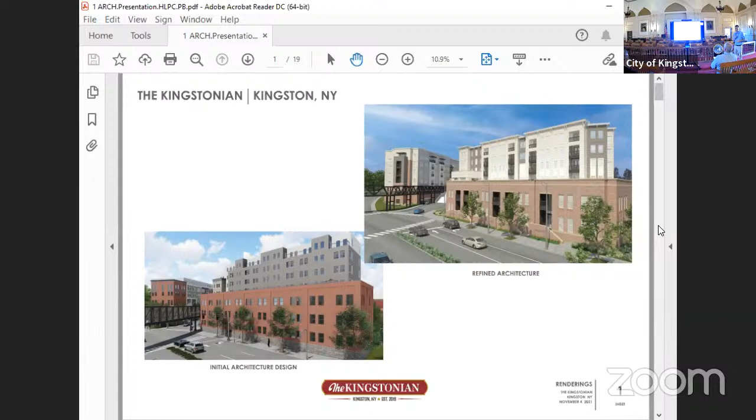So this is the view from Schwenk Drive here. There's a parking garage entrance. You see the blue car here with 2 entrances, one to the east, one to the west. And when we get to the floor plans, you'll see how all of that flows. There's also an entrance to the parking garage, public parking garage from North Front Street.

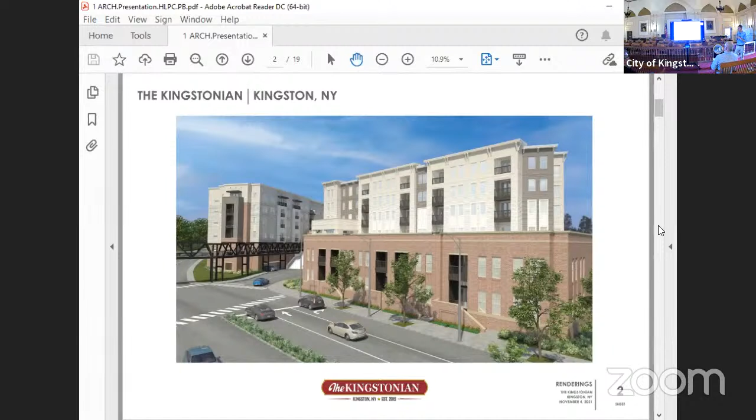Here's a view of the project from Wall Street and North Front Street. Again, notice more detail has been added to the facade, much more variety and interest with the bay windows here. The building is more complete and complementary to the existing context in Uptown Kingston.

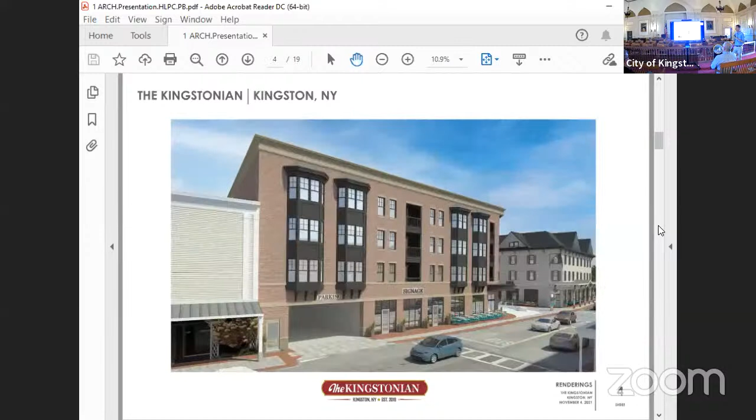Here's a close-up view. We have street level retail, the entrance to the public parking garage, pedestrian plaza that Dan's going to talk about in detail, the hospitality element of the project off to the east there.

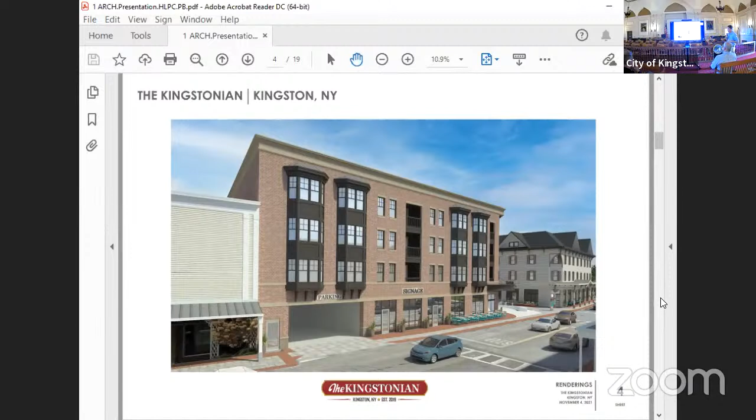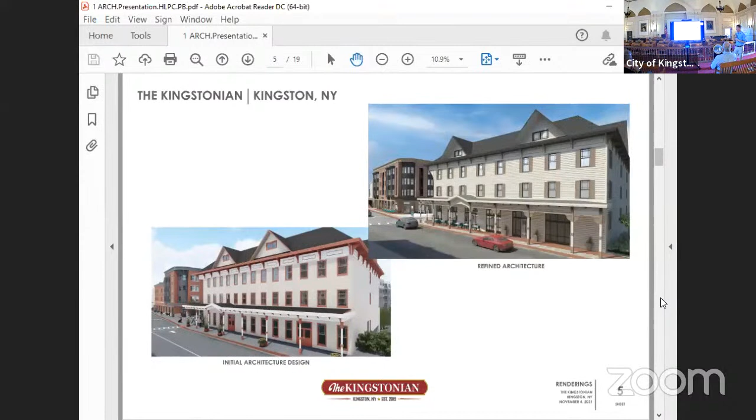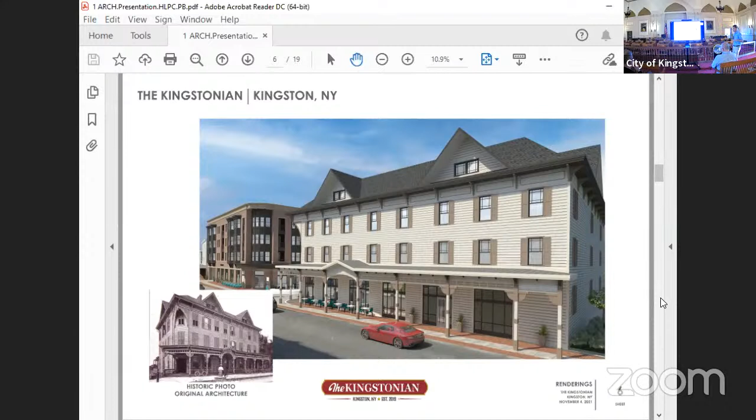There you go, close-up view. And you can see that we've modified the fenestration package for those of you that were watching the project over the last 5 years, to bring it into greater harmony with the context of Uptown Kingston.

Floor plans, this is the lowest level from Schwenk Drive. The elements are color coded here. The green is parking. We're going to work our way up through the plans here.

The elements in yellow are vertical circulation, so that's either stairs or elevators. There are multiple elevators in the project, public elevators as well as resident-only elevators. Where that condition occurs, they are side by side with one another, and residents would use a key fob or a card access, and the general public can use the elevators to get to the lower levels.

Now would be the time that we talk about the circulation through the garage, how traffic will flow from Schwenk entering, and then also front, and then how the traffic will come in on the parking spot and then exit out. Certainly, coming in from Schwenk Drive, there are two entrances to the parking garage, one to the east and one to the west.

So I'm going to step across the screen here. So from Schwenk Drive, cars can enter this side of the parking garage. Ultimately, they connect, or residents would enter this side, and the resident parking is secured.

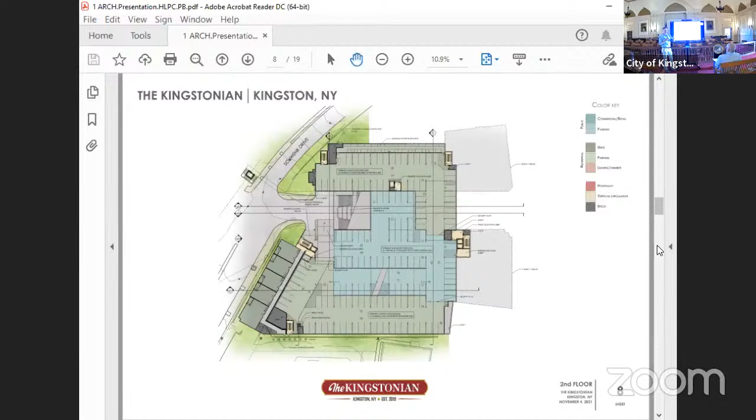Then maybe, Kyla, you might need to flip forward a couple of slides till we get to, here we go. So from North Front Street at the end of Wall Street, this is where vehicles enter only. There's no exiting of the vehicles. That gets public or resident cars into the internal ramping, parking layout, and ultimately they would exit out of Schwenk Drive.

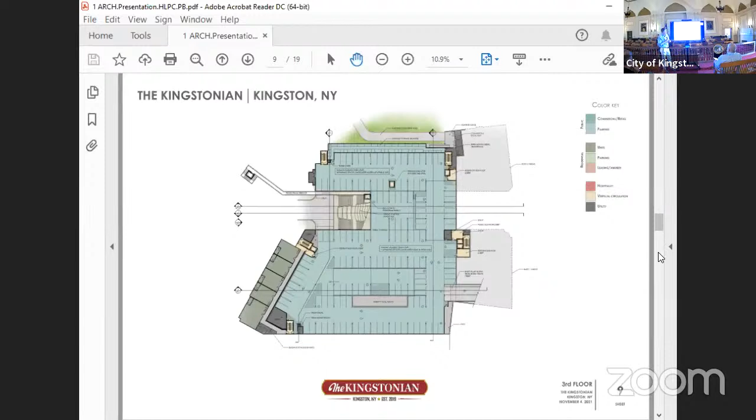The pedestrian link takes you along the eastern edge of the plaza to this element here, which is an elevator, a handicapped accessible elevator and stair that would get you down to street grade.

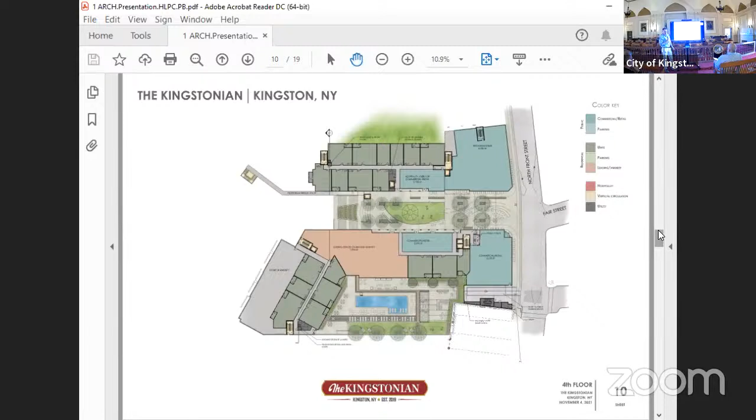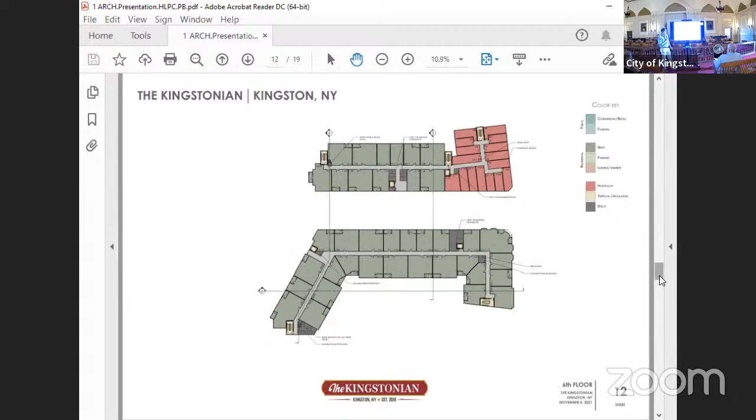On the upper floors, the reddish color here are the hospitality rooms. Green color here are apartments. Again, it's the 6th floor.

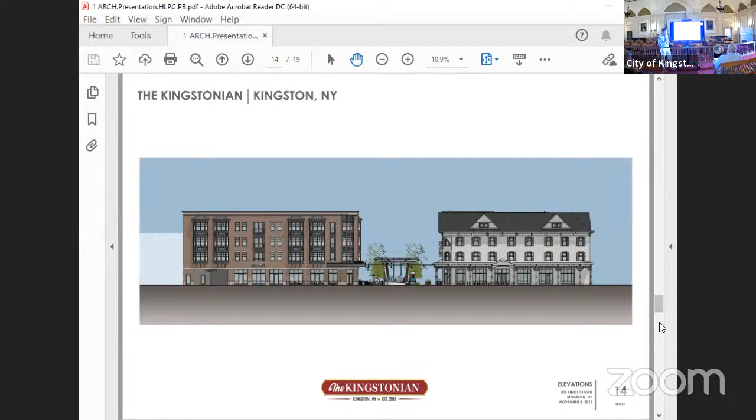In the package that's been on the city website for the last few months, you see 2-dimensional colored elevations. The plaza here. Elevation view from Schwenk Drive.

These elements here are stoops that get people up into the first level of apartments on Schwenk Drive, which is a half a level up from the sidewalk elevation. It has handicapped accessibility with internal vertical circulation. But these elements here is your traditional, like, brownstone type of front stoop.

Cross-section views through the project, North Front Street, Schwenk Drive here. Here's a view looking east, North Front Street here. You see the pedestrian bridge and the vertical elevator element there.

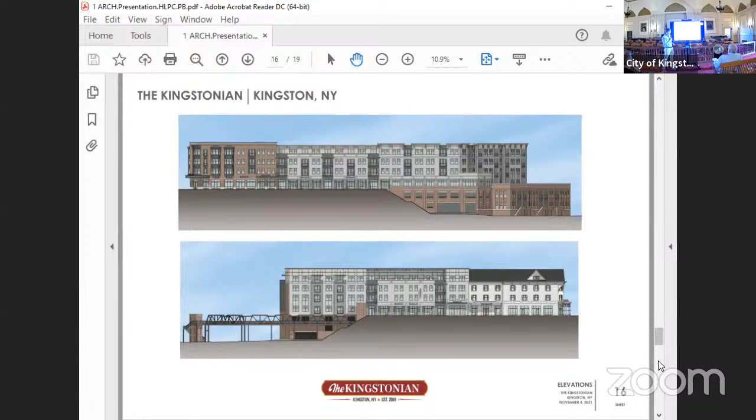These are 3-dimensional views that were prepared primarily for the benefit of the Landmarks Preservation Commission and the Heritage Area Commission. You start to see here the architectural detail that's more contextual to the Uptown District than the earlier iterations of the project.

Discuss the different types of building materials. Sure, that are being prepared for these structures. With a sense of heights, so the building that's on North Front Street to the left here, that's brick.

These elements here would be a product called Extira or Boral or Hardie board, so that they can be painted. We have storefront glass on the ground level, and I should note that we did clarify for Landmarks and HAC that despite the fact that there is a reflection shown here in these illustrations, the glass would be non-reflective. That's just a function of the computer rendering software. The other elements would be Hardie board, and the wooden brackets up here, they're not going to be pine, they'd be a product like a Hardie product, Extira or Boral, so that they don't need to be painted every 3 years and they'll last over time. But these are painted elements.

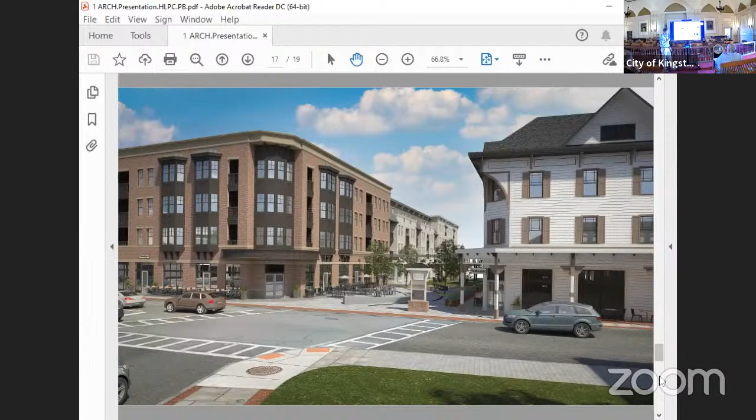Same is true for the building on the east side. We have asphalt shingles on the hospitality element. And then, of course, the regular commercial flat roofing that is not visible from the street on the structure. Dan is going to walk us through the materials proposed for the plaza.

Another internal view. This was requested by the Historic Landmarks Preservation Commission to present for the public and their board what the interior facades look like, and to illustrate and demonstrate the amount of detail and variety and depth in these buildings. You can see here that there are elements that pop off the main facade so that it's not, as it appears in a two-dimensional elevation, a flat facade. There are a lot of opportunities for the sun to create shadows and interest in these interior facades.

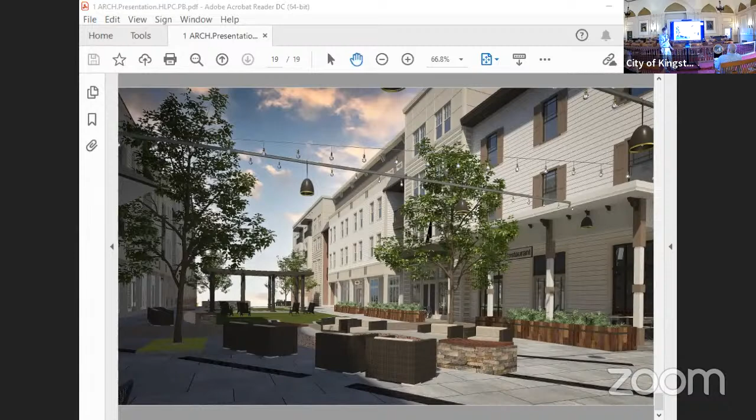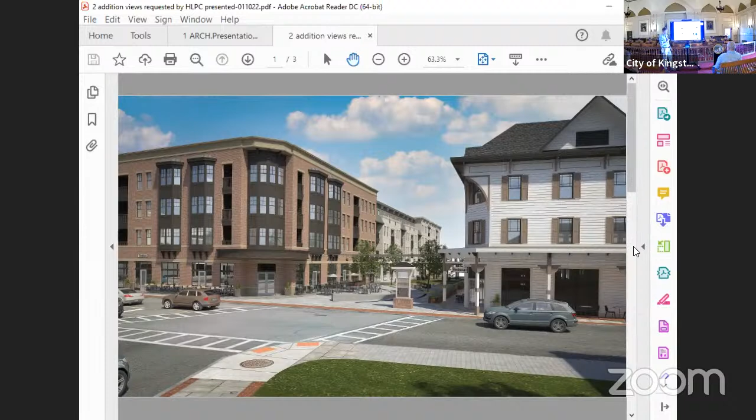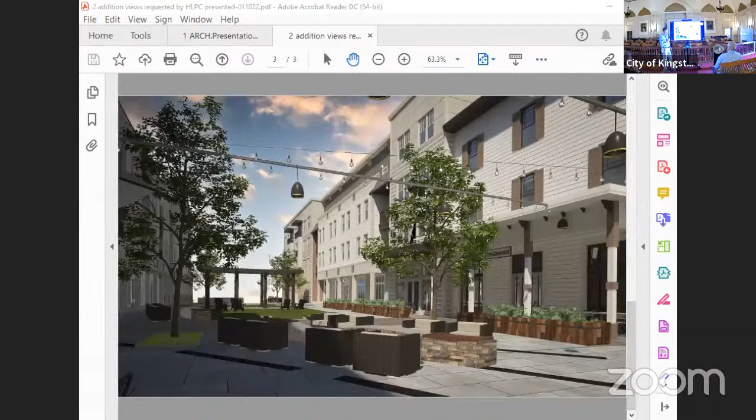We showed this. This view was specifically requested by the Landmarks Preservation Commission, as was that one. So with that, I'm going to hand it over to Dennis Larios, unless there are questions about architecture.

Thank you, Scott. Thank you, planning board members. I'm Dennis Larios from Brinnier and Larios Engineers in Kingston, working on the site civil engineering elements, services to the building. As you know, this site is 95% building and pedestrian plaza, so a lot of my work is around the periphery of the site.

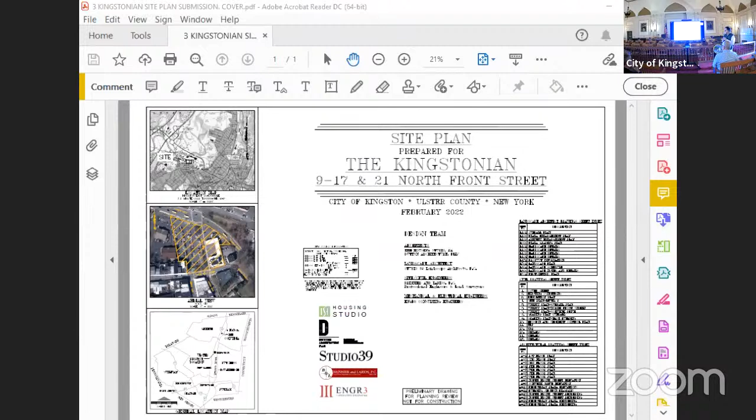Existing conditions.

The former city parking garage, which before that was the Montgomery Ward's building, is on the western side of Fair Street Extension, representing about 1.4 acres. Fair Street Extension itself, from North Front Street to Schwenk Drive, is 3/10 of an acre. The Herzog properties, the old Herzog warehouse and the Uptown Grill site, are 8/10 of an acre. So the project site is essentially 2.5 acres of land situated between North Front Street and Schwenk Drive.

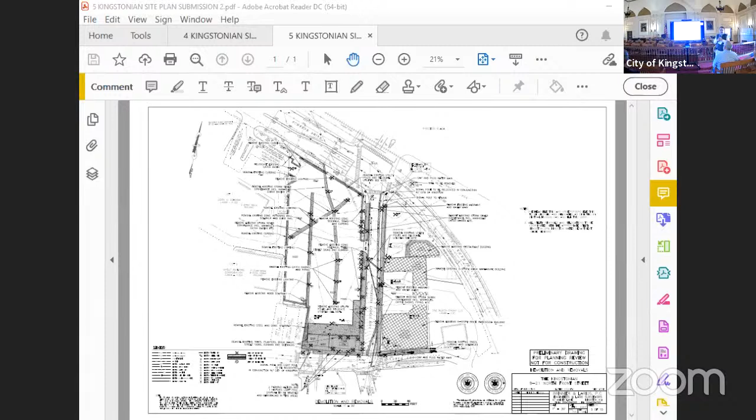This represents the removals, everything that has to be removed from the site before construction begins: storm sewer lines for the existing parking lot and the buildings themselves, and retaining walls, etc. That is all outlined and detailed on the removals plan.

So you can see the West Campus building and the East Campus building. For information purposes, about 98 of the apartments will be in the West Campus, and 45 apartments will be in the East Campus.

This is the entrance Scott was referring to into the garage, either on the west side or the east side. This will be a service entrance for deliveries to the building and for refuse collection, which will occur here and here. Refuse will be stored in the garage space in compactors and rolled out at delivery time, including recyclables, which will also be collected and rolled out at delivery time.

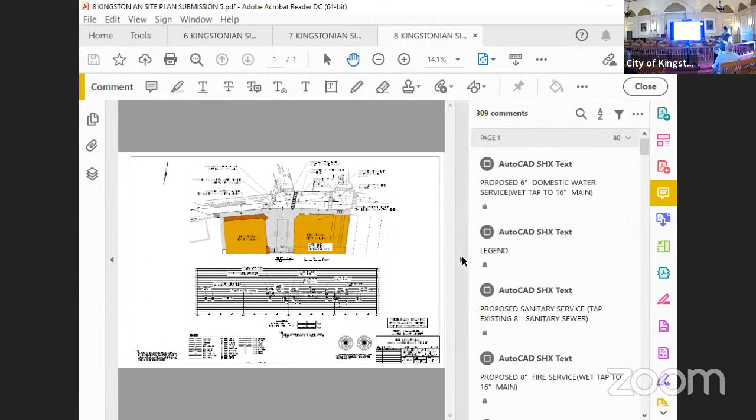This is just a detail of that work out in North Front Street, along with profiles of the storm sewer work and more detail of the water line work we're doing there.

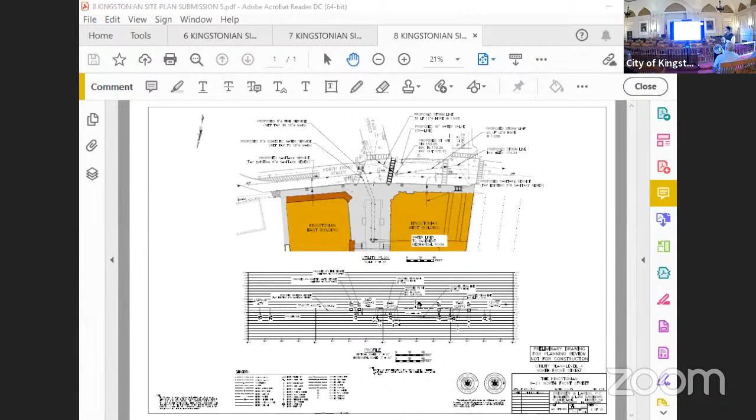Gas and electric is being coordinated now with the mechanical design team and Central Hudson. We've been meeting in Scott's office, and they are working on that.

Central Hudson said they probably wouldn't take it from Frog Alley; they would take it from Hurley Avenue. But they're obviously very interested in serving the project and working with the developers—so much so that they brought 4 guys from Central Hudson. We did a charrette meeting in our office with the mechanical engineers and civil, but for the most part, they're looking to come off of Schwenk Drive.

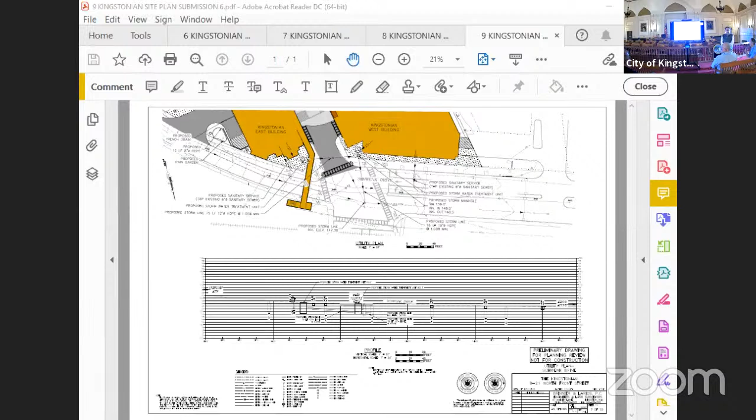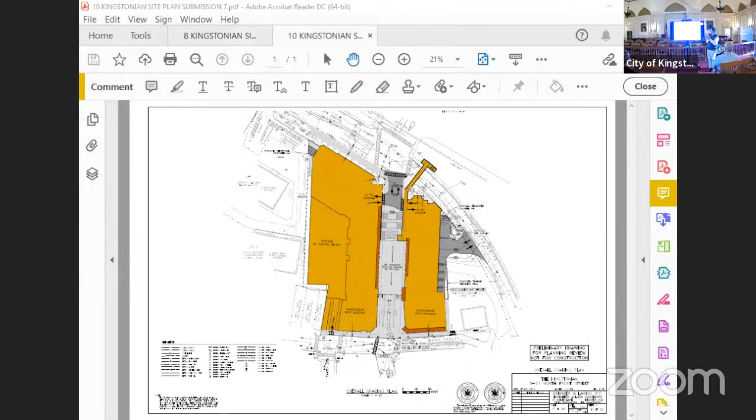This plan shows the grading that's going to occur in these areas. The grading plan for the pedestrian plaza is part of the landscape architect's scope, which he will review. But essentially, the only grading on the project is in these two locations of significance, and that's where we have to create delivery lanes so that deliveries aren't made out in the street like the majority of uptown.

I should have touched on this, but I think it's worth pointing out how we've thought through resident move in and move out and refuse, so that those activities aren't happening on the public street. There are a couple of trash chutes and compactors in each building that bring the trash down. There's also, with this easement here, the opportunity to create a resident move in and move out location so that moving trucks aren't queuing up in the street. Residents can conveniently back up there. There's a room, there's a lift to take their belongings up to their apartment.

So the retail uses that are going to be on North Front and maybe the first portion of that plaza, are they going to have the ability for loading and unloading? Right here, yes, they will have that. There's going to be ability for them to use it.

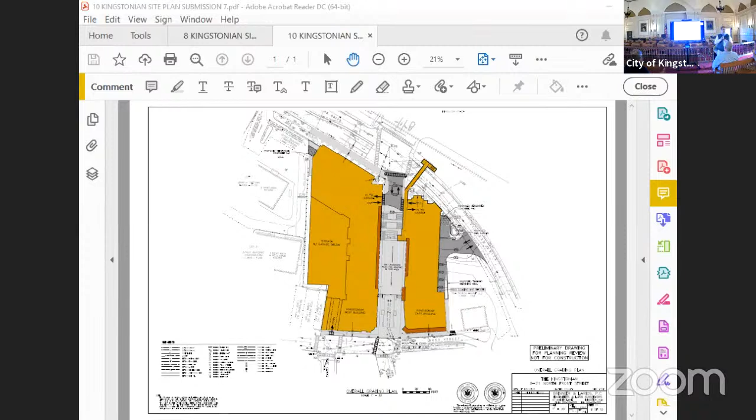Wayne's question earlier was about if you enter the garage but realize you made a mistake. I believe that's going to work - you'll circle through the garage to the exit, and you won't get charged if you didn't stay there over a certain time period. I believe that's how that will work.

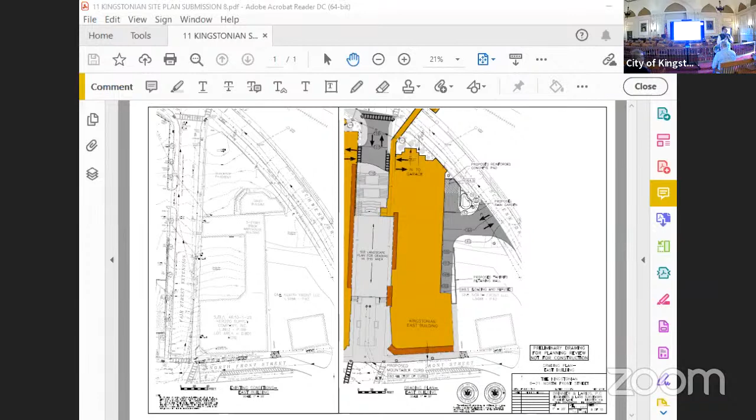Okay, so I'll now introduce Dan Dove from Studio 39, who's done a lot of work on making this an attractive site, and we'll let him take over.

Is this good? I'm pretty loud, I think I'm louder than Scott. My name is Dan Dove again, I'm with Studio 39. I appreciate you guys having me out here. It's nice to finally meet you. It's good to - I've been to the site a few times now, and it just keeps getting better every time I visit. I was actually able to spend some time there today, which was nice.

This is the only part I'm going to read, but I just want to make sure - so right now we have the overall site that Scott went through: the pedestrian bridge here, the public plaza here, the private courtyard amenity pool area on this side, and then the pet park amenity on this side on Schwenk. You can go to the next slide.

Oh, man. I hope not.

I have hard copies. Can you bring the hard copies out? I do have the... oh, is that... okay.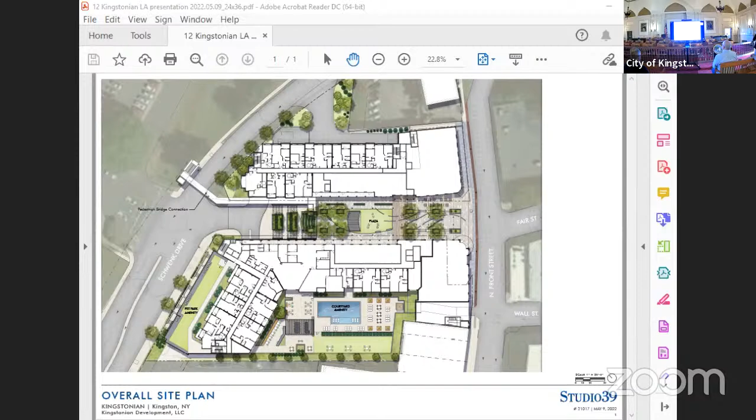Yep, that's it. You just skip through to the next. You're welcome. Yeah, all right, skip to... so that's the overall we just went through. You can skip to the next one.

Okay, good. So this is just the enlargement of the pedestrian plaza area that we had talked about earlier. I wanted to go over 3 goals we were trying to accomplish when designing this area: to complement the vibrancy and charm of the existing uptown Kingston area with a simplistic design that was tasteful and inviting, also functional for events; to provide a viable community space for retail, recreation, and events for all residents and visitors; and to provide the pedestrian thoroughfare that connects Front Street to the Kingston Plaza across Schwenk Drive.

So there's some elements I'll talk about, Front Street first. What's going on right now? There's 2 separate areas we've designed in this section. There's the retail section on both sides here, and then a pedestrian thoroughfare that ramps up into the heart of the plaza.

With this elevation change, it divides the 2 spaces so you have this larger retail café zone on both sides, and a pedestrian area in here. With the topography changes, we've added some amphitheater seating on both sides to provide different variety of seating instead of just tables, chairs, umbrellas. People have the ability to sit on these sort of benches provided along the pedestrian thoroughfare.

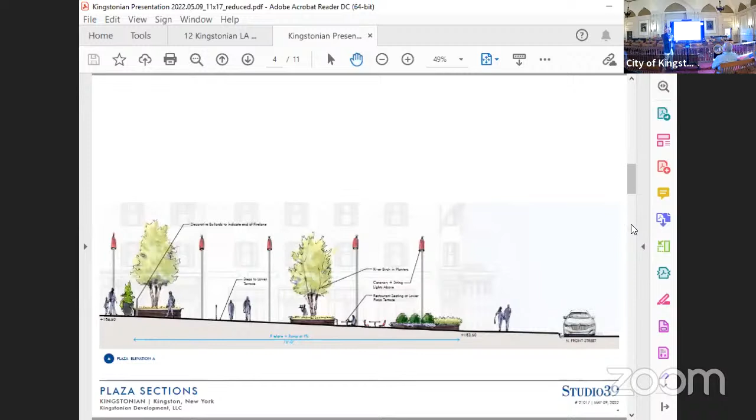This is a section cutting through that ramp area. So retail on this side, retail on this side. This is the actual pedestrian thoroughfare, and I'm just trying to show how that topography works in between this area down to this area.

What's kind of nice about this transition of grade is that you're able to have these sort of decorative amphitheater seats or different types of seating along the retail, so if somebody just wants to come and have a sandwich, they could sit out here.

Well, honestly, you would probably have to have some sort of skate stop on the bench parts of the amphitheater. I'll show you pictures—we've got amphitheater seats we've done in Valley Forge, and they've got little skate stop pieces that they put on the end for concerts. I totally agree with you, it's tough. We would have to have something on those planters too, but yes, we would take that into consideration.

Just the catenary lights—we made sure that this worked. It was more than 14 feet for fire access, so it's clear. You can go to the next slide.

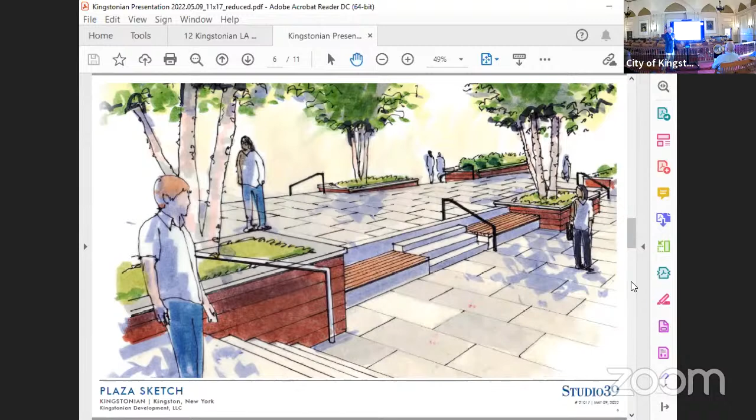Just to give a really basic sketch of what we're thinking about, to show the area where the ramp is down to the retail zone, and how we can create different seating elements within that plaza. We're thinking people could sit on these planter walls as well. Go to the next slide.

On the terraced portion of the stairs that go down to Schwenk, we were proposing more of a fastigiate carpinus so that it doesn't create too much canopy going over the stairs. It just gives you a little bit of a shade element.

Just more upright evergreens and different types of grasses. Everything's native around this area. The boxwood isn't, but I looked at zone 5B here and it survives in that zone. They give you a lot more of the vertical hedge screening that I like to use in some areas.

Yes, sir, the river birch will handle the plant material in those planters. The boxwoods and everything else we're proposing are more on the periphery, on grade, but these will survive well in raised planters. This is native and drought tolerant grass. So really it's a simplistic design of low level grass with the river birch in the plaza. You can go to the next slide.

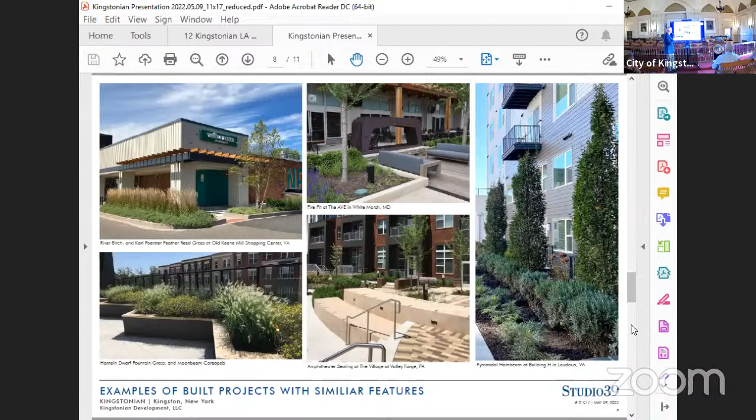The amphitheater seating that we were proposing, and this is just to show the carpinus, that fastigiate tree I was trying to show you down on the terrace stairs. You can go to the next slide.

I'll go quickly through this, but this is the public pool amenity. Here is our interior club room, so we'd have access out into this portion. We're proposing a 6-foot rail along this piece just to make sure nobody comes through from this area into this one.

The pool's used - it's not a public pool. This is a private amenity. Thank you for clarifying.

When the pool's not being used in these courtyards, sometimes what we've done - they're used till 7 o'clock at night, used 2-3 months a year - what we try to do is separate these areas so you can use this area for the full year. Just a different lawn area, different from the plaza, a multi-purpose space for people to recreate down here, with a bar and grill, outdoor tables, kitchens, fireplaces, grilling areas in this zone. But one thing I wanted to point out is that we'd try to separate these areas.

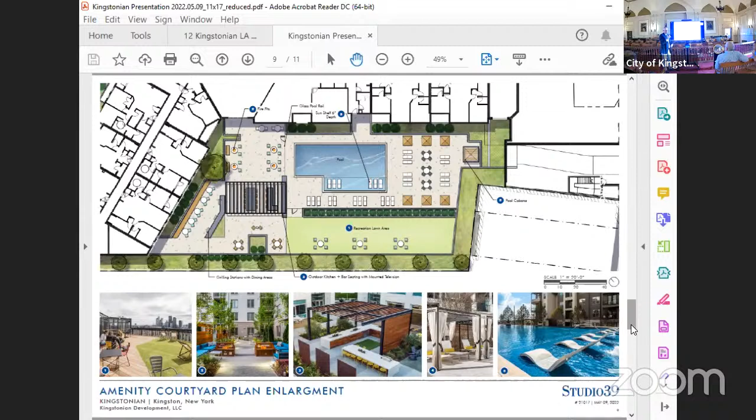No, ma'am, it is - this would be artificial turf. It's just to get lawn equipment in here more easily. Honestly, in the plaza area I would recommend that just because of maintenance and foot traffic and things like that. You can go to the next slide.

These are just different pictures and elements we've proposed on other projects. This is our other private amenity - it's our pet park. This would be sort of a pet run along this area, with a 6-foot fence around this whole zone so the dogs stay in that area.

These are private patios, and we wanted a screening element to help buffer that area, which would also be artificial turf. What we've done on other projects is irrigate it to keep the smells down.

Yes, sir. I'm sorry, I didn't.

There's an entrance in here from the stair. These are elevators, right? And then you come in through here. There's another area that comes off the stairwell down in this area.

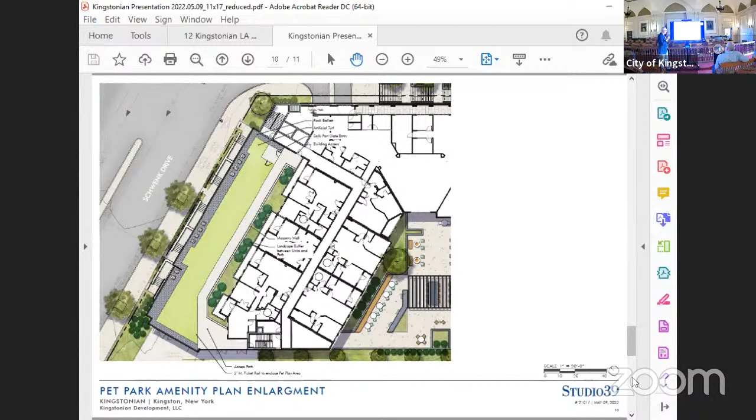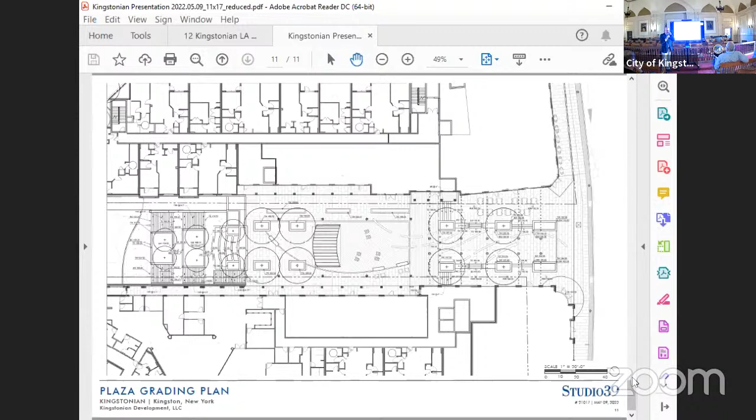Exterior landscaping was mainly just to help provide a streetscape element look on Schwenk. If you could go back to the overall, the second slide on here, sorry. One more. So what we tried to do is just provide a streetscape element along Schwenk, providing some different types of trees along in here.

A hierarchy, we usually have a taller evergreen shrub and then just a mix of smaller shrubs or ornamental grasses or perennials along the building facade to help soften the building facade.

This area right here is actually 30 feet lower than the pool deck amenity. So we have just some shade-tolerant ornamental trees, some different plants and shrubs in through here.

Different screening elements. We wanted to help screen the parking lot, so we added some more of the fastigiate evergreens that I was showing you in those other images. Just some buffer plantings in through here. We really wanted to try and help screen some of this wall and the trash pickup area and stuff like that. So it's really just different types of plants, different hierarchy of stuff.

And I got all these—Scott was nice enough to give me the Kingston, it was the Henry Street project tree list. So all the trees that we're proposing are everything that's off of that list. That is it, sorry. Yes, sir.

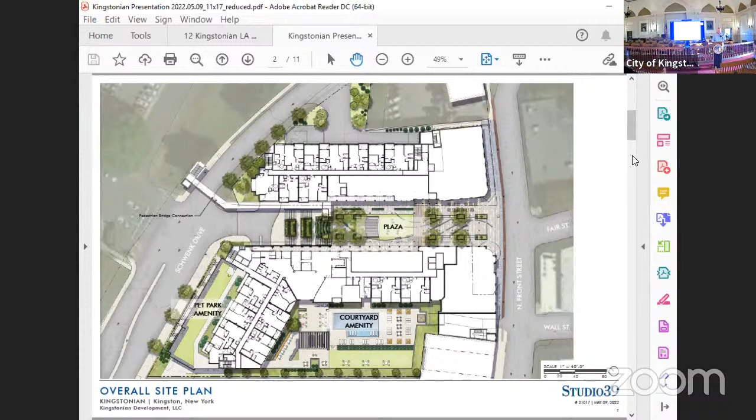So at this time, any questions from the board? We're looking at, we're still meeting after the 17th. We're still looking to do special meetings for this project, not to include that in the regular meetings, or what are we? I know Brad had a question about that earlier with me.

Right now, the developers are looking to know when the next scheduled meeting would be after the public hearing. That's his question. So you're going to be working on that. We're not going to have an answer tonight, right, Sue? So, Brad, you can discuss that at staff level, or Mike, to get that going. I hope that answers your question then.